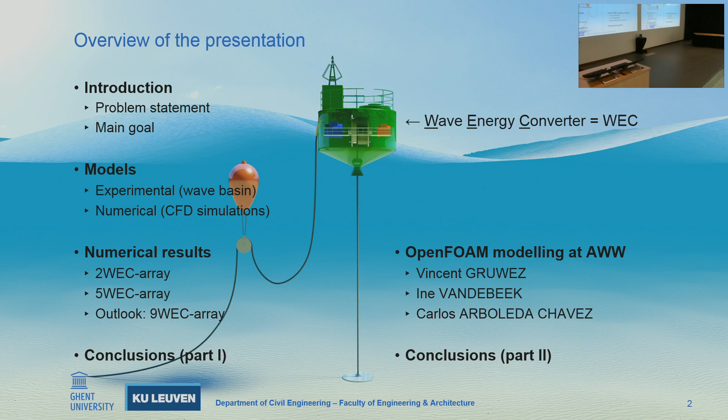So now we are fully warmed up, and how is the rest of my presentation structured? I divided it in 2 parts. The first part is about my research dealing with wave energy. So first I will introduce the problem statement and main goal of this presentation. Thereafter I will talk a short moment about the 2 models I've used. The first one is an experimental model which has been used to validate the second one, a numerical CFD model. And the most interesting part of this presentation is dedicated to discuss the obtained numerical results. But I'm not the only one who is using OpenFOAM in our group, so I will also present the work of 3 other colleagues. And for each part, I will end with a short conclusion.

So what's the whole idea of my research of wave energy converters? As you may know, one WEC is not sufficient to capture a significant amount of wave power at a specific location. And therefore, multiple WECs are arranged in a geometrical configuration called an array layout. In such an array, there are interactions between the different devices. So let me make myself clear. If one device is hidden behind another device, it's shielded from the incoming waves, meaning that it will capture less wave energy. But we want to maximize the power output of the complete array. So we have to find the optimal position of each WEC within the array.

And that's why the flow field is so important around the devices. And to study that flow field, I'm using the CFD toolbox OpenFOAM, because it solves the 3D viscous flow field around the devices, but also the motion of the devices. So in OpenFOAM, I perform numerical simulations in a numerical wave tank. But then the question is, why do I need CFD? Because we all know that simulations can take a long time. If we have a storm condition and storm waves are propagating towards the WEC, the waves can break on the device and a lot of turbulence will be generated and nonlinear effects become visible. And those 2 things can be resolved with the CFD model compared to other simplified models.

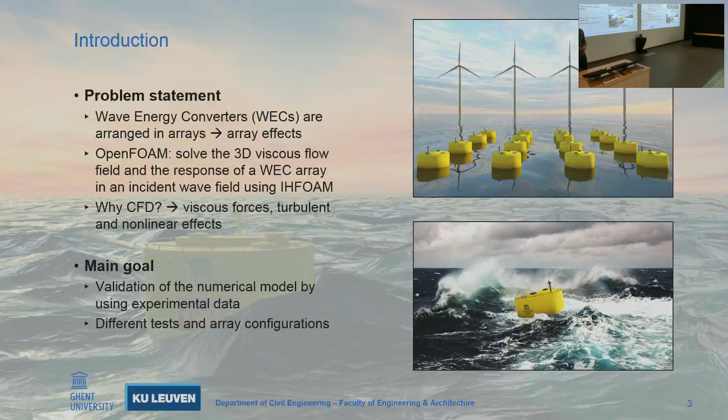So the main goal of this presentation is to show you the problems I faced and the solutions I found in order to validate my CFD model by using experimental data for several test cases. So let's begin with making you familiar with our experimental dataset, the WECwakes project. And for that project, 25 WECs were installed in a shallow water wave basin. And here you see a picture of a 5x5 WEC array layout. And you immediately notice that only the up and downward motion is considered, so the heave motion, by installing a vertical shaft through the WEC units.

But what did we actually measure? First of all, the heave motion, so the up and downward motion of the 25 WECs. Secondly, for the 5 WECs installed in the middle column, we measured the horizontal wave-induced force acting on the devices. And thirdly, around the WECs, several wave gauges were installed to measure the wave field in the wave basin.

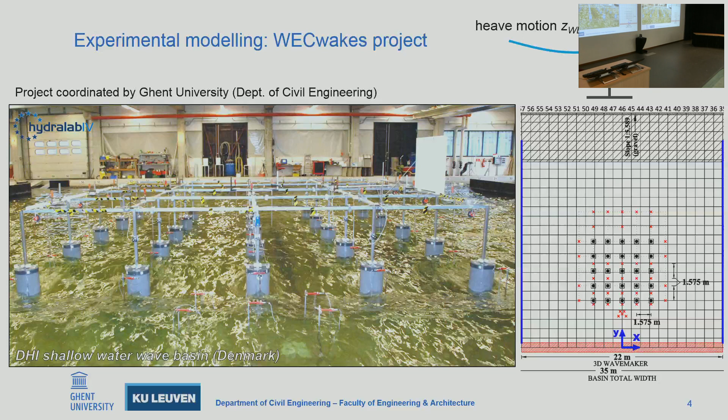But I am a numerical guy, and I'm performing simulations in a numerical wave basin. So basically, that's a box filled with water, shown in red, and on top air in blue, with in between the free water surface shown in white.

So we are solving the Navier-Stokes equations to get the pressure and the velocity in both the water and air phase. And the position of the free water surface is calculated by the volume fraction, which is a percentage of water within a computational cell. And that's based on the volume of fluid method. So basically what we are using is the interFoam or interDyMFoam solver of OpenFOAM.

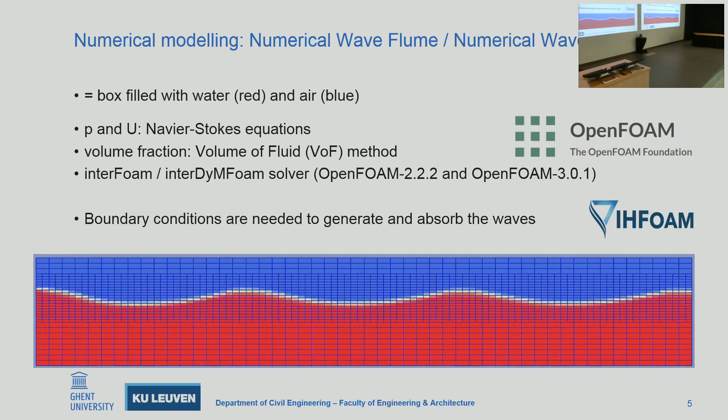But what else do we need? Right, boundary conditions to generate waves and absorb the waves. So here on the left side, waves are generated and they propagate towards the wave flume. And on the right side, they are absorbed. And therefore we use IHFOAM, which is an external toolbox for wave generation and absorption.

But in order to simulate floating WECs, we have to couple two solvers. The first one is our fluid solver, which calculates pressure and velocity by the Navier-Stokes equations. In this presentation, only laminar solutions will be shown because the Keulegan-Carpenter number was quite low. But if turbulence becomes important, I refer to our recently published paper about the buoyancy modified turbulence model, which will avoid wave damping over the length of the flume, but it will predict the turbulent flow field much better in case wave breaking occurs. But more details later on.

And the second solver I'm using is a motion solver, which needs the force acting on the buoys based on the fluid solver, and it will calculate the new position of the buoy, of the WEC. But in order to have a converged solution between the flow field around the devices and the motion of the devices, we need multiple sub-iterations during every time step.

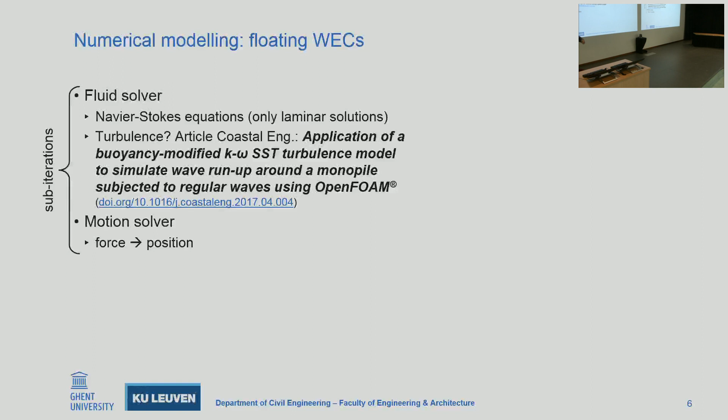And then the next question is, how did we organize the mesh motion in OpenFOAM for multiple WECs? So we are using arbitrary mesh interfaces, AMIs, as indicated by the vertical dashed lines, to create sliding meshes. And those AMIs define a zone of cells around each WEC unit. And those cells will move according to the heave motion, so the up and downward motion of the WEC inside that zone. But as you see, only the highest and lowest row of cells are expanded or compressed.

So only those cells are distorted. And this is to prevent undesirable mesh deformation around the free water surface, so the interface between air and water, to increase the accuracy of the simulations.

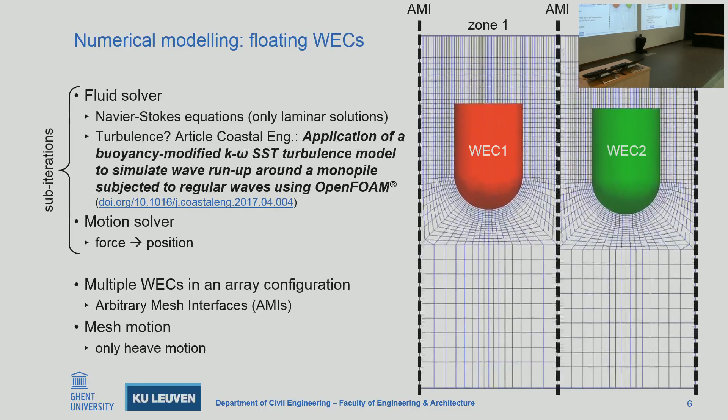So the aim of this presentation is to include all the physical processes observed in the experiments in our CFD model. And one of the most tricky things is friction in the experiments. So here on the left, you see a picture of the experimental WEC, while on the right, you see the computational domain in OpenFOAM. And there is a difference between them. The vertical supporting axis is missing here in the mesh, in order to reduce the complexity of the simulation. But we found that that vertical supporting axis is causing friction, and we had to include a linear damper, which is a friction force proportional to the velocity of the WEC.

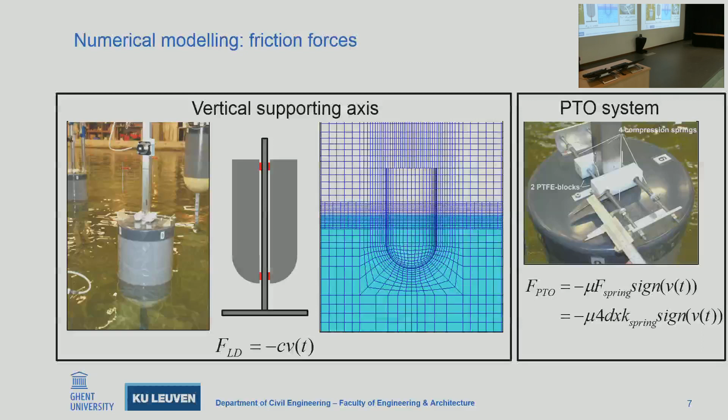But the whole idea of wave energy converters is to extract energy out of the waves, and therefore we need a power takeoff system, a PTO system. And in the experiments, a Coulomb damper is mimicked. So two Teflon blocks, the white blocks, were pushed against the vertical supporting axis by 4 compression springs. So we also have to include that PTO system in our CFD model, which is a friction force proportional to the horizontal force with which the blocks are pushed against the vertical axis.

So now it's time for the most interesting part of this talk, 2 test cases. So remember the 5x5 WEC array? All the WECs were out of the water except for the 2 WECs installed in the middle column, WEC 4 and WEC 5. On those 2 WECs, the linear damper is activated for the vertical supporting axis and the Coulomb damper is activated for the PTO system. And those WECs are freely floating in the water. And we are generating regular waves, so consecutive waves, all with the same wave height and wave period.

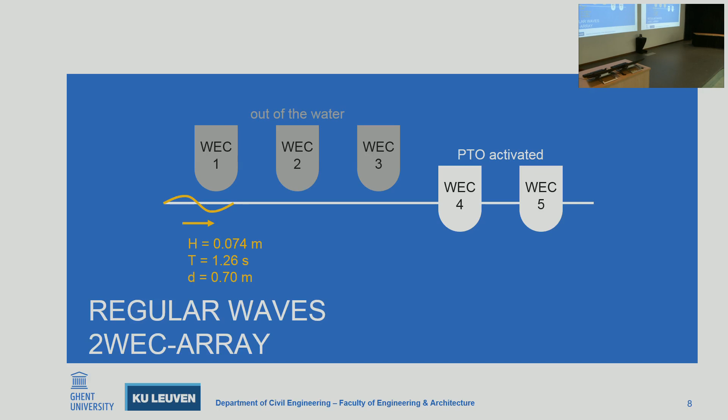So let me make myself clear again. We are generating waves, and those waves are propagating towards the WECs. But we know that waves will cause a horizontal force pushing against the WECs. So they will push the WECs against their supporting axis. So this means that we need a second Coulomb damper, but this time proportional to that horizontal wave-induced force acting on the WECs.

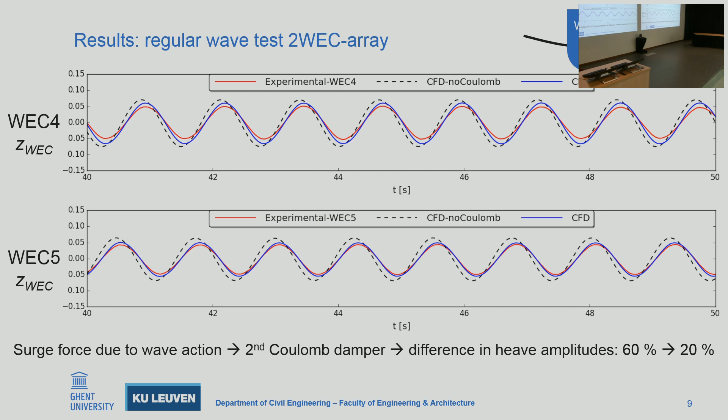So let's do a new CFD simulation with a linear damper and the 2 Coulomb dampers, and we get the blue lines. And we notice that the difference in heave amplitude reduces from 60% down to 20%.

On the top 2 graphs, that horizontal wave-induced force, the surge force, is given as a function of time for the experiments and the 2 CFD simulations. And we see 2 things. First of all, the 3 lines are more or less identical. But secondly, that second Coulomb damper doesn't have an influence on that surge force, which makes sense because it's a wave-induced horizontal surge force.

On the lower left, you see time series for the surface elevations, so the position of the water level at 3 locations in our wave basin. And the same observations can be made, that the 3 lines are almost identical, that the second Coulomb damper doesn't have an influence on the wave field in our wave basin.

On the right, you see a snapshot of our numerical wave basin. And the waves are generated here at right, and they propagate towards the left, where they are absorbed at this boundary. But we see that there is a decreased wave height over here. And that's caused because we increased the aspect ratio of the computational cells in order to speed up the simulations. But by increasing the aspect ratio, the waves were damping out. That's a numerical issue. But that's actually a benefit for us, because we want to avoid wave reflection in our numerical wave tank.

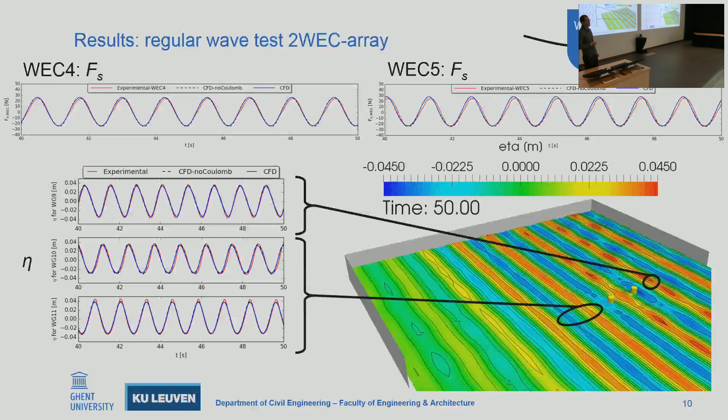So for the second test case, 3 more WECs are added to the domain. So we have 5 WECs installed in a line array. And on those 5 WECs, the linear damper and the 2 Coulomb dampers are activated. And we generate the same regular waves.

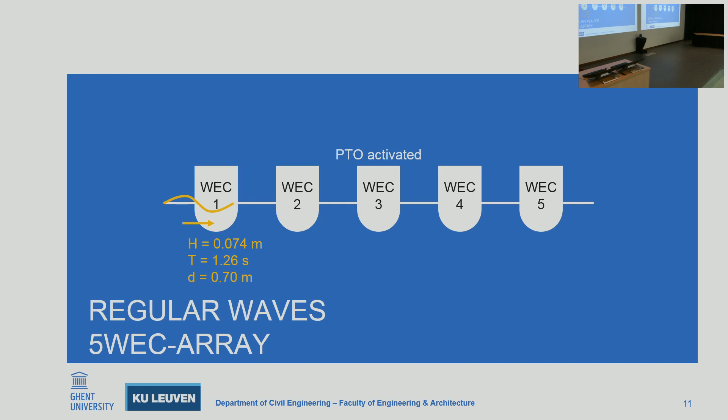So here you see a movie of our numerical wave basin. This time waves are generated on the left, and they propagate towards the right, where they are absorbed. And on this vertical plane, you see the horizontal wave-induced velocity, while on top of the free water surface, contour lines of the surface elevations are shown.

And we see that the wave field is quite disturbed around the devices, because we not only have the incident wave field, but the incident waves will reflect against the devices, but they will also diffract around the devices. And the devices themselves are moving, so they will also generate waves. So it's like a combination of 4 wave fields: incident waves, reflected waves, diffracted waves, and radiated waves.

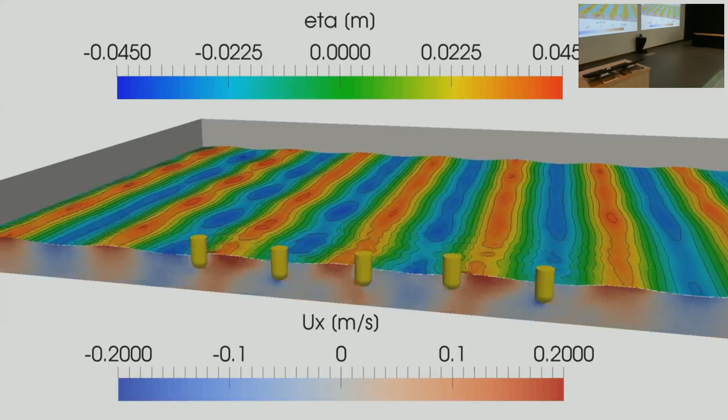So let's have a closer look at the time series of the surface elevations in our wave basin. Again, red is the experimental data and blue is the CFD result. And we see that there's quite good agreement between them. So our model is more or less validated.

So before ending the first part, I want to show you one of my latest results of a 9 WEC array subjected to regular waves. And I think it's quite a unique simulation because it's a fully 3D viscous flow result of the flow field around 9 WECs. So here you see our numerical wave basin, where again waves are generated on this boundary and they propagate towards the left.

And around the array, let's show it here, we see quite a complex wave field. But what else do we see? Just behind the array, there's a reduced wave height. And that's because the WECs are extracting energy out of the waves. And that's causing that reduced wave height. And that's what we call a wake.

But what I want to say here is that with our numerical model, we have a large freedom regarding the number of WECs, the position of WECs, and the sea state which you want to simulate. And also the resolution of the surface elevations is much higher in the horizontal directions compared to the surface elevation measurements in our experimental wave basin.

But I don't mean that experiments are not useful anymore. They are very useful, not only for validation studies, but also to get insight into the physics. I mean, you cannot kill all problems with only one weapon.

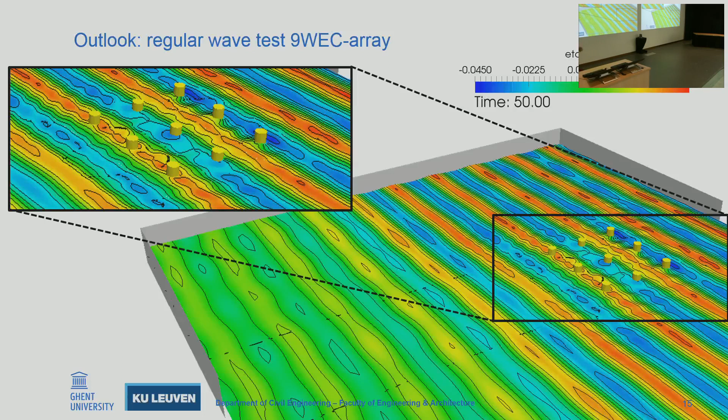So to conclude the first part, I performed CFD simulations in a numerical wave tank using OpenFOAM. And that model is validated by using experimental data, and I have shown 2 test cases, a 2 WEC array and a 5 WEC array.

So further research will include the validation of a larger number of WECs, like the 9 WEC array I showed before. But I also want to analyze the importance of viscous forces and nonlinear effects. And the last thing I want to do is include turbulence modeling, because if storm waves are reaching the array, they will break on the device, and I want to assess impact loads and quantify the survivability of the array in those storm conditions.

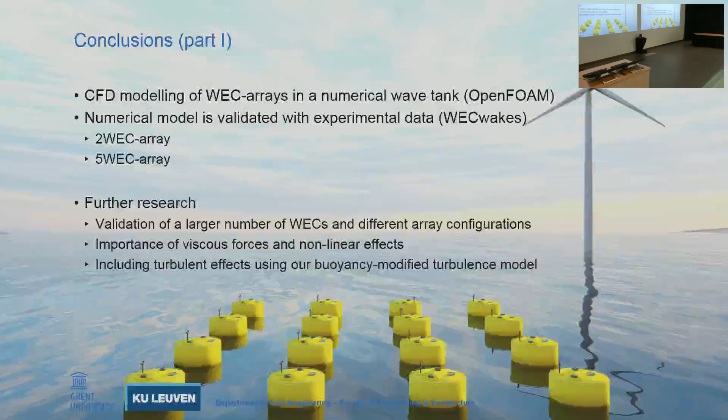But you can study more than wave energy in our numerical wave flume. So before I simulated floating objects in our numerical wave basin, I performed a study of wave run-up around a monopile foundation. And those monopiles are used for offshore wind turbines as a foundation structure. So waves are generated on the left and propagate towards the right.

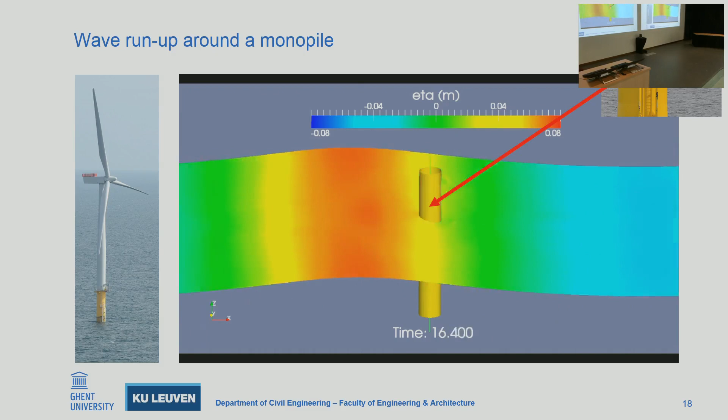And wave run-up is defined as the additional increase or decrease of the water level due to the presence of the monopile. And why is that wave run-up important? Because the maintenance platform on those monopiles shouldn't be destroyed by the waves. And also this simulation is validated by using experimental data, and we found a quite nice agreement between the black line, the experimental data, and the dashed lines, the CFD results.

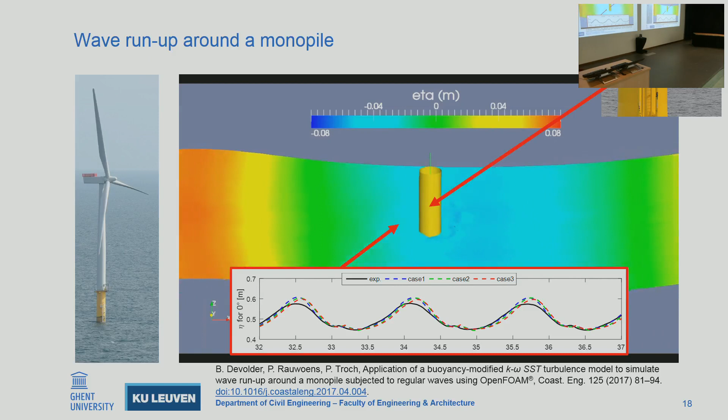Another interesting application is the simulation of wave breaking. So waves are generated here on the left, and they propagate over a sloping bottom, so the wave height will increase. At a certain moment the waves will start to break. But the tricky thing here is turbulence modeling.

Because for wave propagation, so the first zone, we don't need turbulence generation at all. But once the waves are starting to break, we need a fully turbulent solution of the flow field. And that's why we developed our buoyancy modified turbulence model, which will not generate turbulence here in the wave propagation zone, but it will make better predictions of the turbulent flow field at the zones where the waves are breaking.

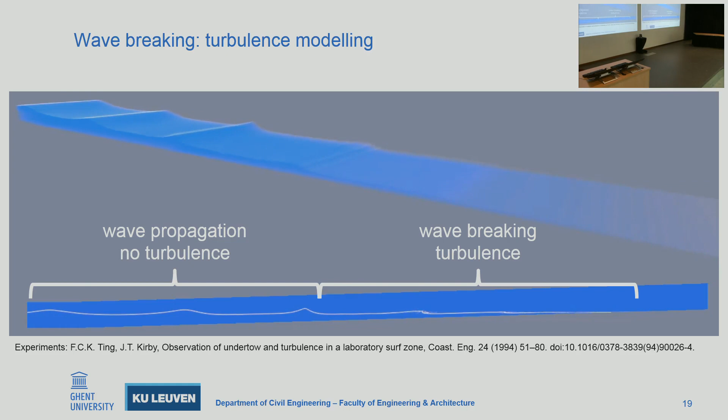And it's not only me who is performing CFD simulations in our group. So I will now present the work of 3 other colleagues, and I will start with the work of Vincent Gruwez, who is sitting there. Maybe raise your hand. That's Vincent.

His PhD deals with modeling wave overtopping for a climate-resilient coastal defense system with a very shallow foreshore. So that's typical for the Belgian coastline. And his work is part of the big CREST project. And the goal of his PhD is to develop a prediction methodology for wave overtopping, as you can see here on the dike in Belgium,

to study wave impact forces on sea defenses, and the risk of casualties in buildings. Because in Belgium, we have the dike, we have the promenade, and we have the buildings next to it. So that's what he wants to study. And therefore he is using numerical models. In the first instance, he will start using OpenFOAM. But the problem with OpenFOAM is that the simulations can take a while.

And that's why he is thinking of coupling a faster solver, like SWASH for example, at a certain point, and then transfer that information to OpenFOAM. Because SWASH is fast, but it cannot handle complex geometries, while OpenFOAM is slower, but you can simulate quite complex geometries. So he is going to couple those two solvers to have an efficient coupling model.

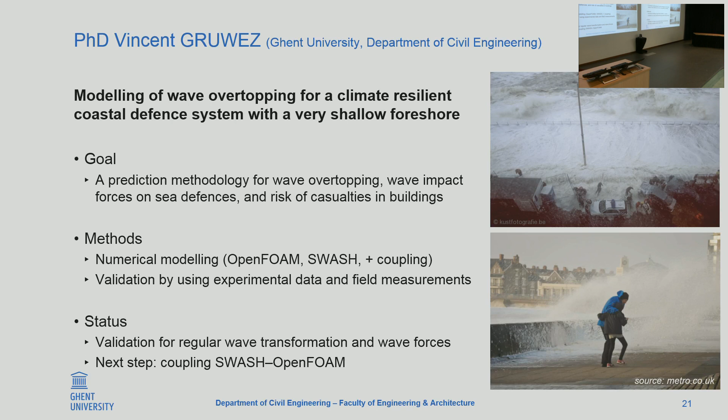And he is going to validate his coupled model by using experimental data, but also field measurements, so real scale or large scale data. And at this moment, he is validating wave transformation and wave forces on coastal structures. And the next step is coupling SWASH with OpenFOAM.

So here you see an animation of his work. So waves are generated on the left and propagate over the very shallow foreshore. So then we are here. Here you see the typical dike structure in Belgium with a promenade, and this wall is like a fixed wall, it's the front face of the apartment blocks at the coastline. So what's important is to get the flow field right here, because it's like a thin layer of water, and therefore we really need OpenFOAM, but also to study the impact forces of the waves on the buildings.

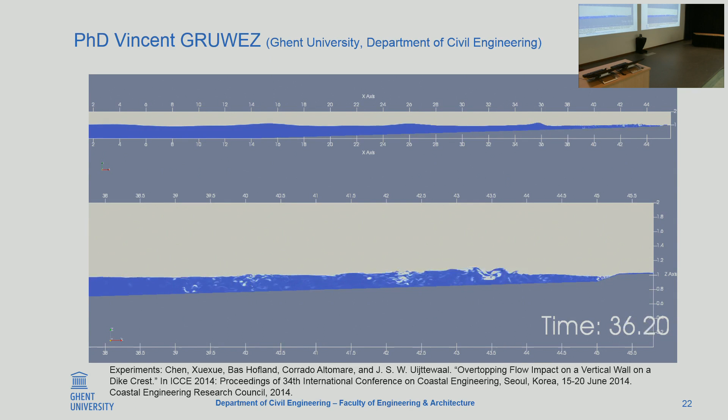Then the second colleague, Ine Vandebeek, who is sitting next to Vincent, she is working on the same project, the same CREST project, but the focus of her work is on numerical modeling of beach profile dynamics for very shallow foreshores. So if we have storm waves approaching the coast, those storm waves can move a certain amount of sand into the sea. So that's what we call sediment transport.

And she will study that using OpenFOAM. So she will perform CFD modeling using the volume of fluid method, but also by using a sediment transport module with dynamic beach profiles. And at this moment, she is trying to implement the sediment transport module in the foam-extend package.

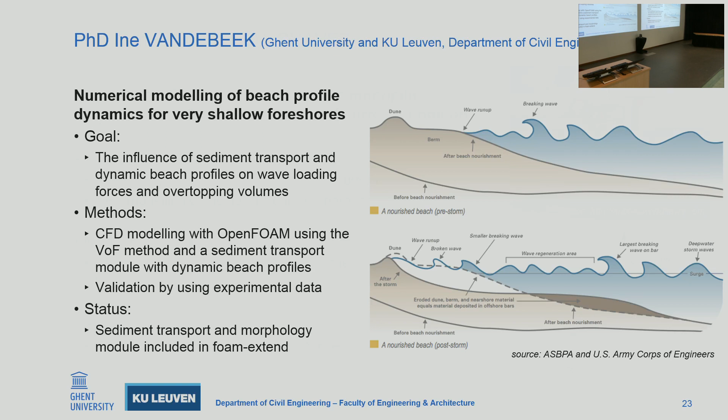And then the last colleague is Carlos Arboleda Chavez, who is sitting in the back. And his PhD is about scour protection around offshore monopile foundations in a combined wave and current condition. So if we install a monopile in the seabed, the local flow velocities increase near the seabed due to the presence of the monopile. And those increased velocities will cause erosion of the seabed around the structure. But that's not good for the stability of the wind turbine. So therefore, we are installing stones around the monopile, and we call this scour protection.

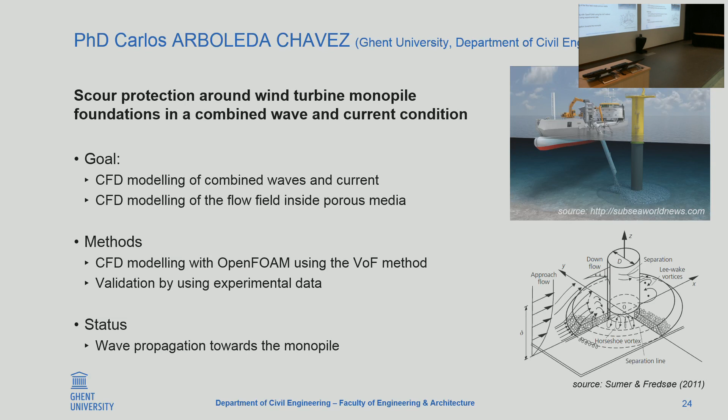So what Carlos will study is, first of all, CFD simulations of combined waves and current, but also the CFD modeling of the porous flow inside the scour protection, because that's like a porous media. And therefore, he will also use OpenFOAM and the volume of fluid method and validate that model by using experimental data. And at this moment, he is trying to get the wave field or the wave conditions right at the monopile. So waves are again generated at the left and propagate towards the right.

And the blue plane is a free water surface. But the most important thing here is the bottom plane, which shows the magnitude of the velocity near the bottom. And that velocity is very important to study the porous flow inside the scour protection.

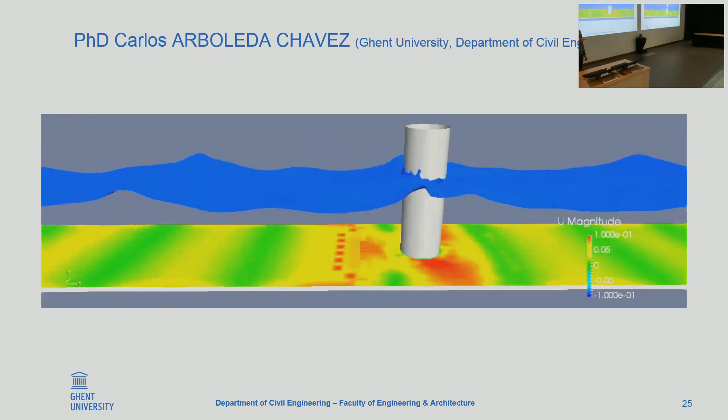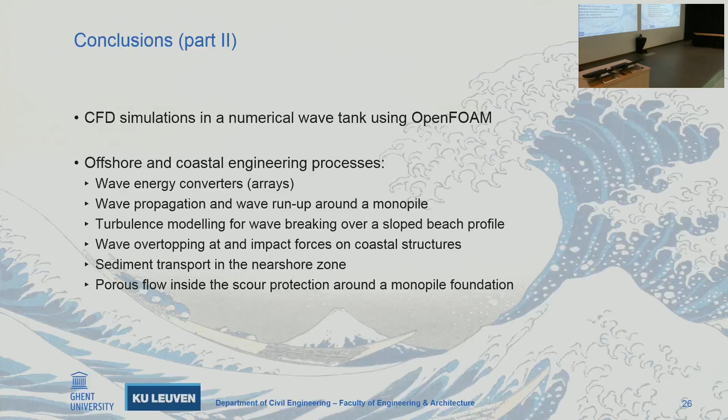So to wrap up the second part of this presentation, in our research group, we are performing CFD simulations in a numerical wave basin for several coastal and offshore engineering processes, going from wave energy converters and arrays, wave propagation and wave run-up around monopiles, turbulence modeling for wave breaking, wave overtopping and impact forces on coastal structures, sediment transport in the nearshore zone, and the porous flow modeling inside the scour protection. So that's it. Thank you.

Any questions? You mentioned that OpenFOAM is not so fast. Maybe you can tell us how many cells you have in your domain and how many cores you use and how long it takes. Okay. Well, OpenFOAM is not so fast compared to other simplified models in our case. So that's why I mentioned it's not so fast. The number of cells that we are using is typically in the range of about 1 to 2 million. And we run those simulations on, let's say, 12 to 24 cores.

But the problem is not the number of cells, it's the time step. Because we have the free surface, we have a Courant limit, and that Courant number should be smaller than 1, and preferably smaller than 0.5. And that's why the simulations are so slow.

Are you aware of the work of Vuko Vukcevic? The ghost fluid method. Yes. Because he developed a nice solver which might be relevant to speed up your simulations. I'm in contact with him, and once the code is released, I will test it for sure, because it seems promising. There's also the yearly NUMAP numerical summer school, and then you can work basically 2 weeks full time with him. Yeah. That's also a thing.